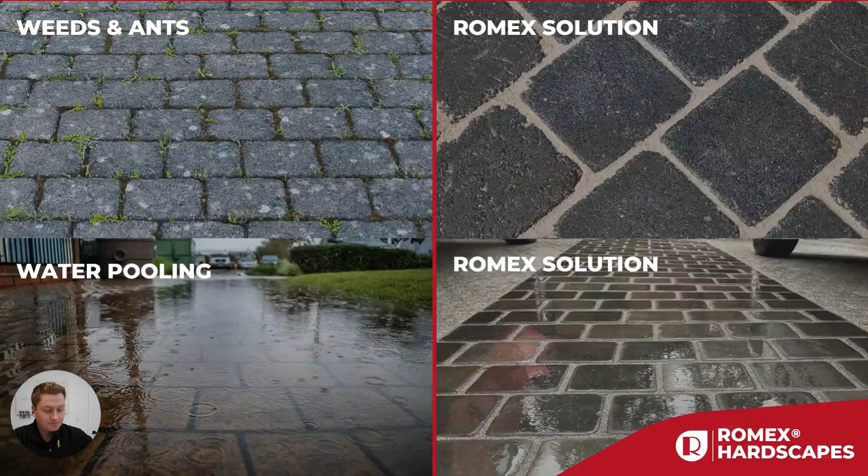So why are these products necessary? Well, in the top left of the screen, you can see lots of weeds growing out of these paver joints. So on the right, you see the equivalent ROMEX solution. So we'll provide jointing products that do not allow weeds to take hold and ants to burrow and remove jointing product.

Water pooling and water management is the next thing. Very important topic. Whether it's just you don't want to get wet feet walking into your office or classroom, or it may be a freezing issue with ice puddles and such forming in northern climates. So with ROMEX solutions, products, and consultation, we can help manage the water and ensure that those surfaces remain puddle-free.

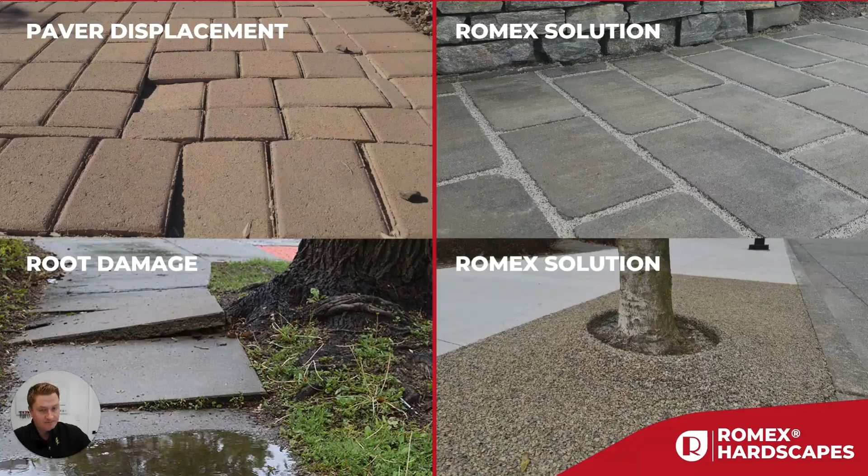The top left, another major issue is paver shift and displacement. So this might just deter people from wanting to use pavers. I always like to say that we are not a paver selling company, but we certainly help sell pavers by providing awesome setting systems, which alleviate the concerns that people may have in eventually defaulting to asphalt or concrete pour.

So we want to keep unit pavers, and setting them the right way is critical to that. So good edge restraint, good setting system, bedding, and jointing products, all preventing the movement shift, which can lead to things like ADA compliance issues, trip and slips, etc.

And then finally, root damage in the bottom left. You can see that when trees are left to their own devices or covered up, they come up looking for nutrients, air, water, etc. And if we have those covered in impervious surfaces, then unfortunately the tree will always win.

So our goal is to give pervious surfaces which are safe and good for humans to walk on, but give the trees exactly what they need so they don't come up looking to damage our hardscape surfaces. So just an array of solutions there in these first few slides as to why ROMEX solutions are necessary.

The first part we're going to look at is going to be the full system, which is the TRASS bed, adhesion elutriant, and choice of jointing product. So we could refer to this as the RSG, or ROMEX System Guarantee. It comes with three main components, which is the TRASS bed, the bedding layer that the pavers will sit on.

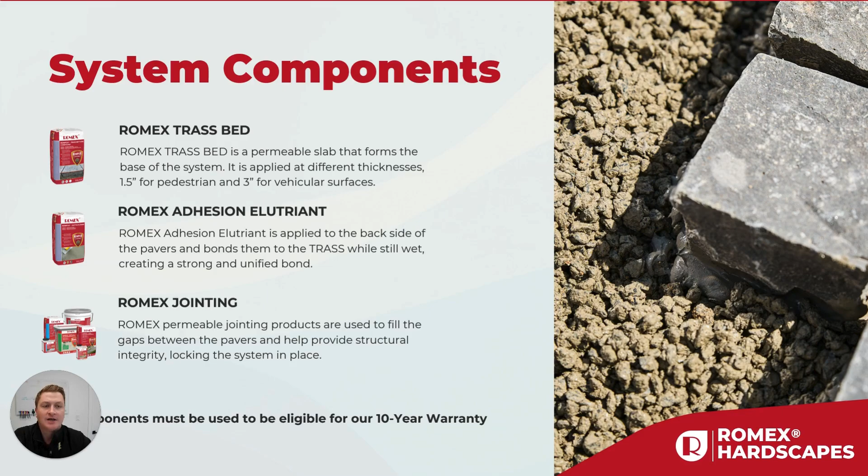The adhesion elutriant, it's like a thin set. It's what bonds the paver to the bedding layer. And then finally, ROMEX jointing product, a choice of jointing products which can fill the gaps. And we determine those based on the parameters of the project, essentially the loading, maybe the water infiltration rate required, or parameters around the unit pavers themselves, jointing width, etc.

We have a full set of detailed drawings which can accompany any project specification-wise. We have 3D images, we have these 2D images, and these really provide what I would call a basis of design.

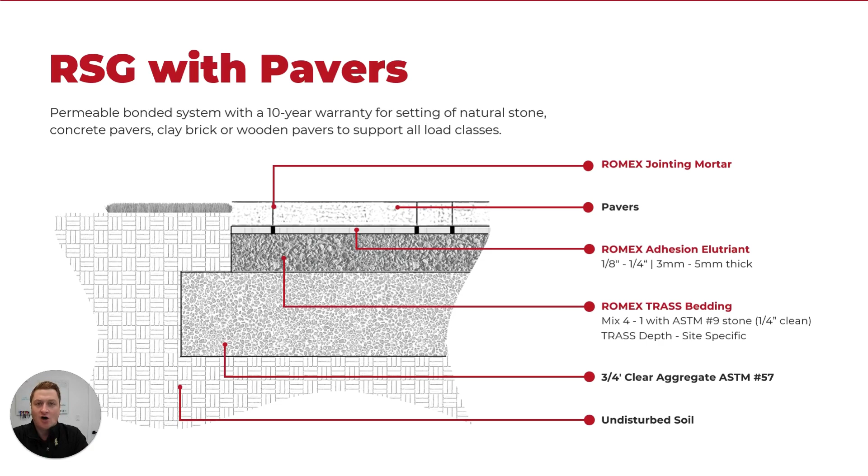Every project has its differences and quirks, but these give you a good platform, if you like, to build off of. And you can see here that our general assembly entails 3/4 inch clear crushed aggregate for on-grade applications as a base product. The ROMEX TRASS bed at a certain depth, typically 1.5 inches for pedestrian areas and up to 3 inches for vehicular. The ROMEX adhesion elutriant thin set, which is that bonding agent or glue, if you like, which goes on the bottom of the paver, bonds it to the bedding. And then, of course, the choice of paver with jointing product in between as well. So that's a classic on-grade assembly with the ROMEX system guarantee.

We also do lots and lots of square footage and installations on slab, on podium, above parking garage, amenity spaces, etc. The list goes on. So in this situation, you can see that we have the existing concrete structural slab. We then build off of that with the TRASS bedding. There may or may not be insulation required there, depending if it's a living situation or not. The adhesion elutriant, of course, bonding that paver to the bedding, and then the paver with choice of jointing going in as well. So 2 different approaches.

Of course, I just want to point out that the ROMEX system here can also be used just in overlay situations. It's not always required that you break out the concrete. As long as we have a way for the water to escape, that's the main thing that we're going to drive towards.

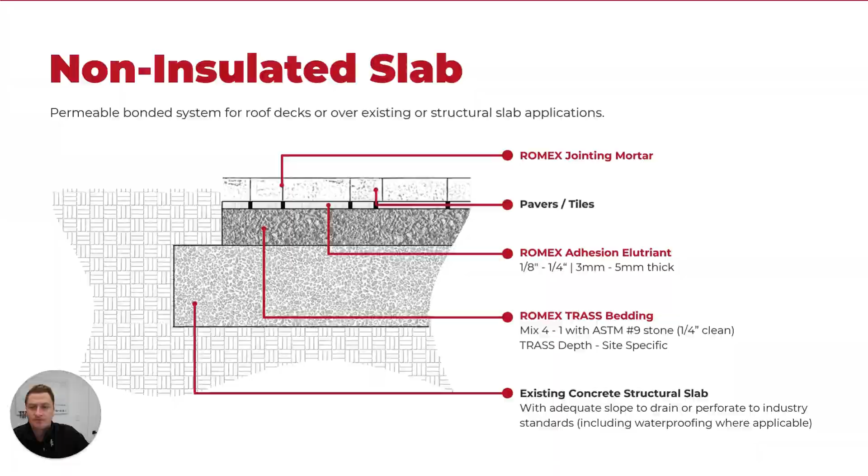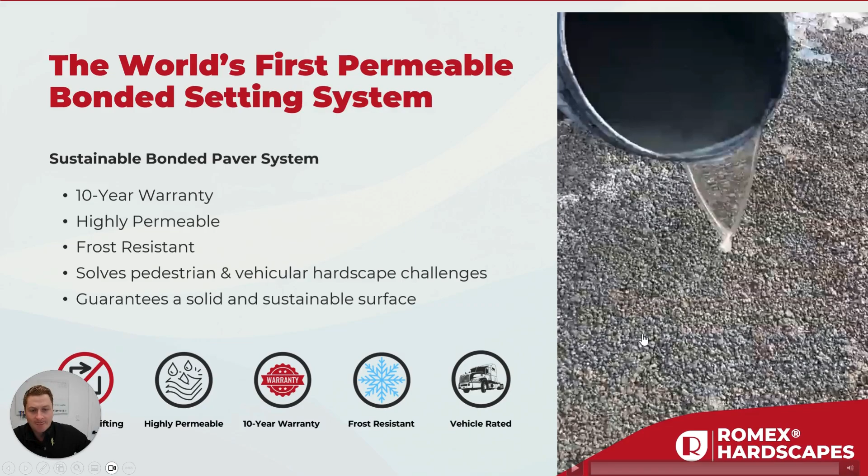So, quick look at the TRASS bed. This is the world's first permeable bonded setting system. ROMEX was the first to create an entirely permeable bonded setting system using TRASS bed, adhesion elutriant thin set, and a choice of jointing product in between. You can see here when I play the video, the bucket of water getting poured onto the TRASS bed. It's extremely porous. It basically just disappears the moment it touches. We have the ability to provide this system with a 10-year warranty, which can be applied for through our website.

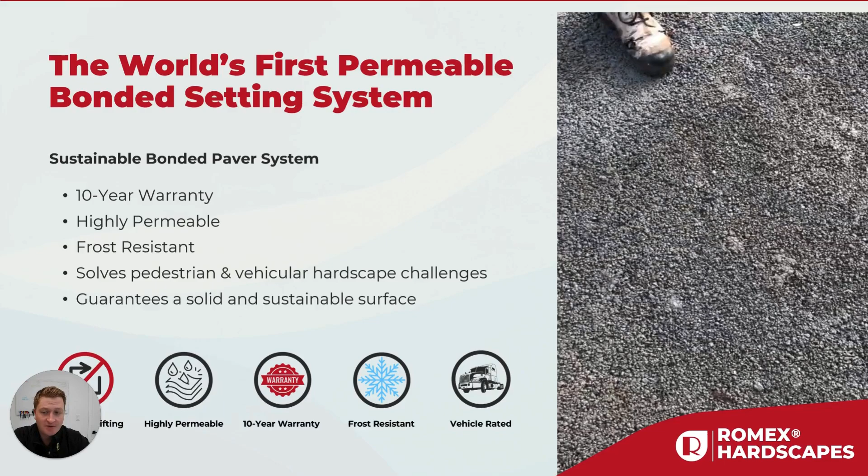It is, of course, highly permeable. By eliminating trapped water, it becomes frost resistant. So if there's no water trapped in the system, there will be no frost heave present. It solves the pedestrian and vehicular hardscape challenges. So whether that is, again, water management, the ability to power wash and easily maintain, use de-icing chemicals, or just paver shift, which causes trip and slip and possible lawsuits, these systems will resolve all of those issues, and it guarantees a solid and sustainable surface overall. And you can see some of the main icons at the bottom of the screen here, just as reminders of the key bullet points.

So TRASS bed is a direct replacement for the need to pour concrete or into the mud setting or wet setting type applications. It's an upgrade to sand setting pavers, of course, but it actually is a time and money saver when it comes to the traditional methods of pouring concrete and bonding. So the reasons why is there's no forming, rebar, and slab prep. And also critically, these products won't allow any efflorescence to leach out. We have suppressants in there through the polymer technology, which latch on and prevent those chemicals coming out, which provide efflorescence. And of course, the jointing on the surface is a resin product rather than a cementitious product as well.

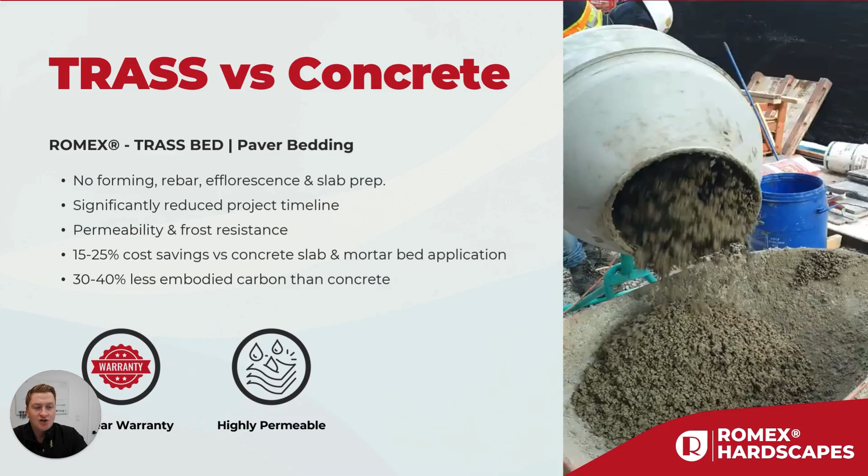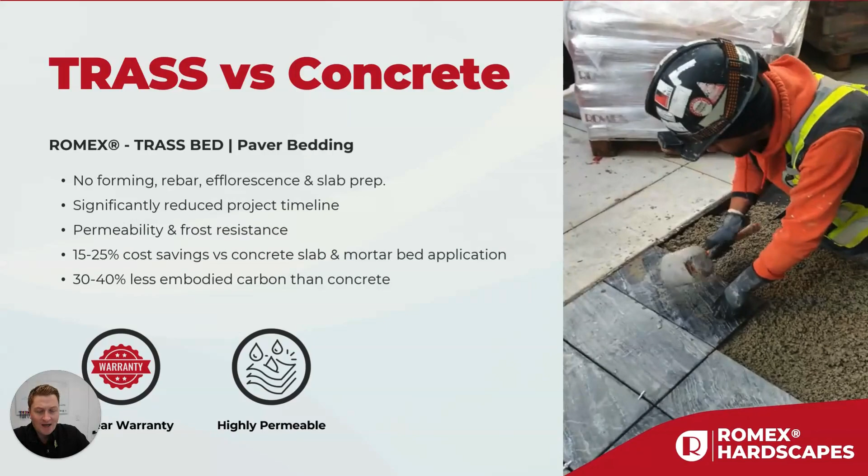There's significantly reduced project timeline. That is because you are not going through the rigmarole and process of pouring, doing rebar, prepping a concrete slab, waiting for it to cure. You're actually installing and mixing the trass on day one. You can see here the freshly mixed trass bedding coming out of a cement mixer, simply getting wheeled over to the area of site. This is an on-slab application here. The material is loosely screeded into place, thin set applied, and we're setting the pavers wet to wet. So that slab is doing a 2-in-1 job. It is the support structure and also the bedding application as well. So you're cutting out an entire step there. Much faster application, time is money.

It's got permeability and frost resistance. We just touched on that a short minute ago, but because it will not hold water, it is therefore highly, highly frost resistant. There's approximately 15 to 25% savings on the ROMEX system here versus pouring a slab and mortar setting down. A lot of that comes from the time, money, and effort spent on pouring concrete. And the reason for the range is that obviously costs vary depending on which part of the continent you may be in.

And finally, there's 30 to 40% less embodied carbon in the trass product than there is in typical sand and cement. So if that's a key driver for your project, please feel free to come and talk to us about that. But essentially, the trass contains minerals, rather than being entirely fired by energy, such as Portland cement is.

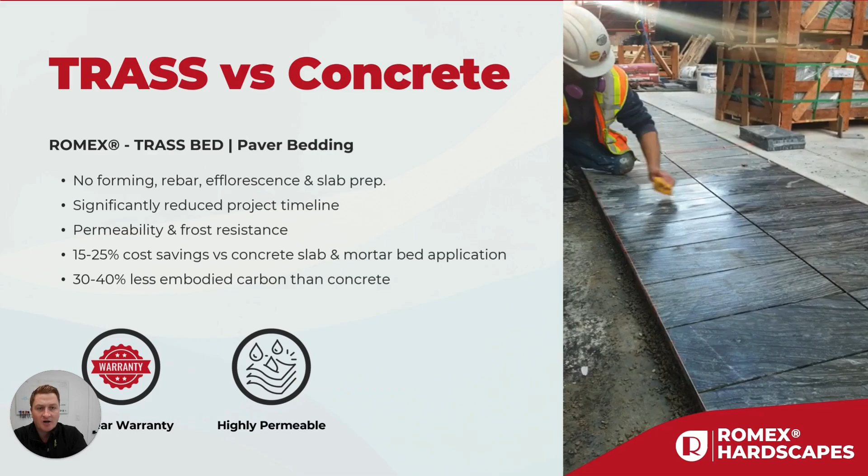Like I said, this system, 3 parts, the trass bed, the adhesion elutriant thin set, and the paver jointing, is available with our market-leading 10-year system warranty. So to touch on the adhesion elutriant just for a moment, I like to refer to it as an unsung hero. Doesn't get a lot of limelight, but it does an amazing job basically making the paver unit and the bedding become one. So I like to say if we have 3 inches of trass bed with a 3-inch paver, essentially you have a 6-inch slab altogether in that mix, providing great strength and durability, of course.

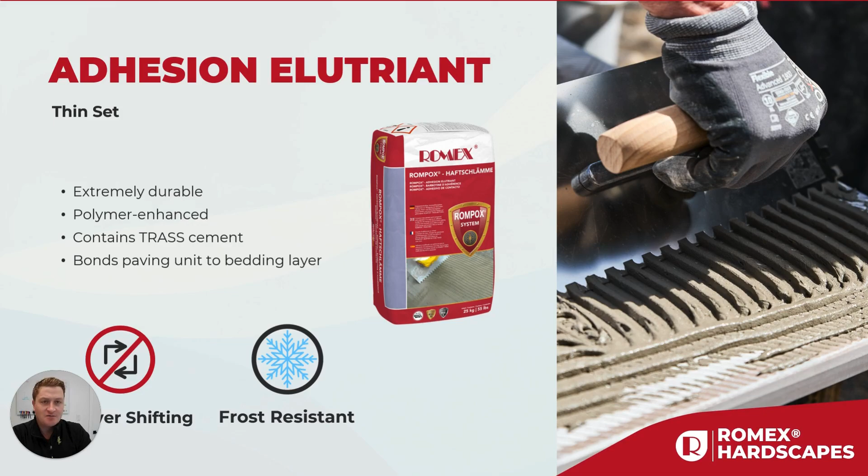So the thin set is a sister product of the trass, so the two of them want to join together. We get exceptionally strong paver pull tests on site, usually in and around 2.4 MPa, of course, general industry standard being 0.5. It contains the polymer enhancements that the trass does as well, even contains some trass cement, and like I said, does the great work of bonding that unit paver to the bedding system. Typically, it's applied to larger units via notch trowel per North American tile setting standards. Smaller units, it is possible to just smear on the thin set with a margin trowel or even dip it into a bucket.

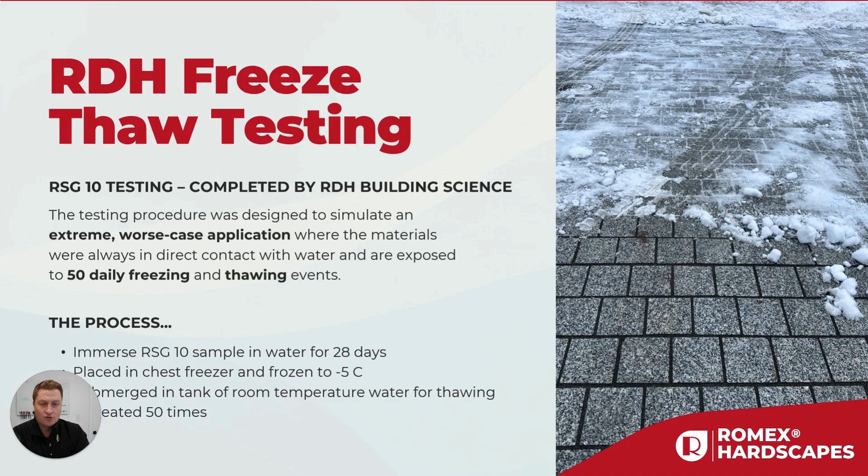Now, to back up what we've been saying, we engaged with RDH Building Science, who created an independent third-party frost test for the system. So what we did there was we created cookies of trass bed, granite pavers with the whole system, and they were sent off for testing. So this was to simulate a worst case scenario application where the materials were in direct contact with water and exposed to 50 freeze thawing events. So the cookies were placed in water for 28 days to fully saturate them, and then basically on a daily basis they were frozen and thawed out 50 times. Just to put it into context, typically clay brick will blow apart at about the 25 to 30 cycles. And of course, we have the report to show that our system went through the full 50.

The great news is that there's a whole variety of uses for this trass system as a drainage slab essentially. But one of the many great uses and something that's really taken on is with radiant heat systems. So lots of projects being done over in the west coast of Canada with Whistler Blackcomb Ski Resort, and now more into the US, Rocky region, Park City, etc. as well. So it's well worth considering. Like I said, great benefit to eliminate the concrete slab.

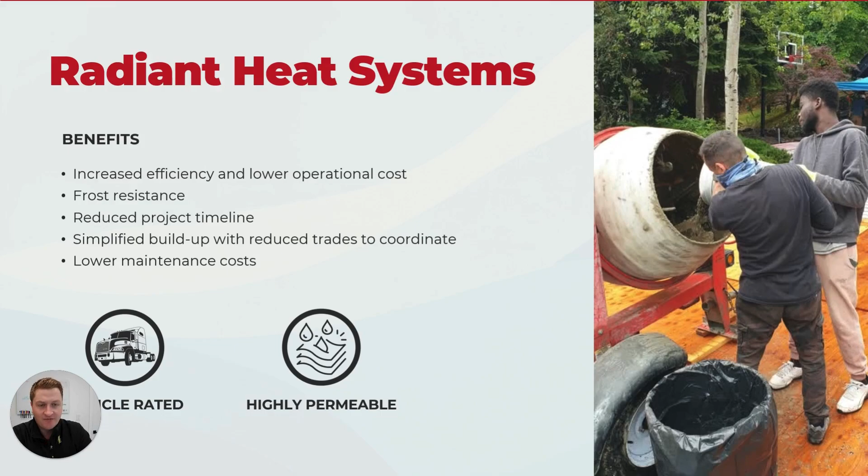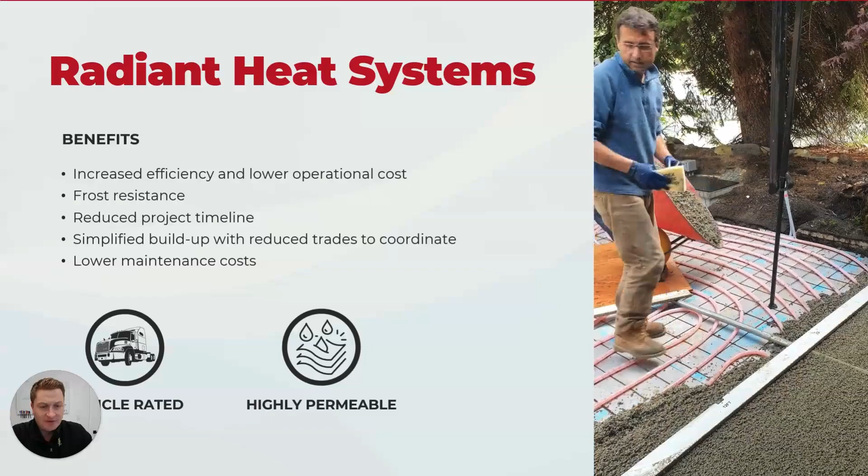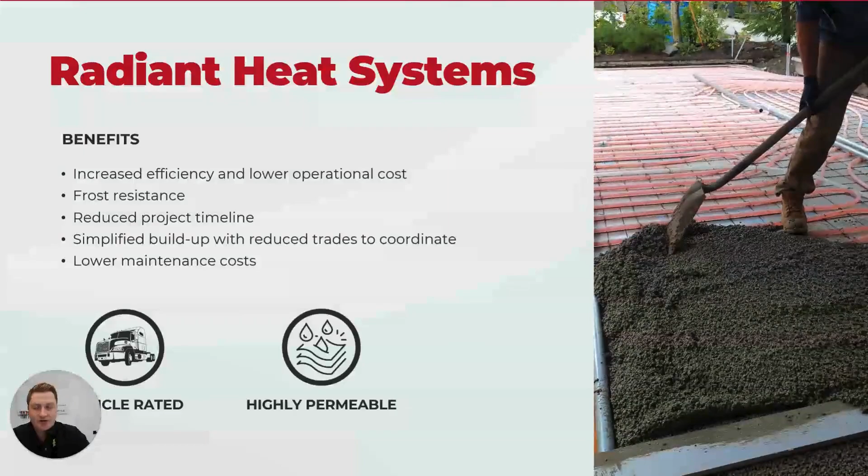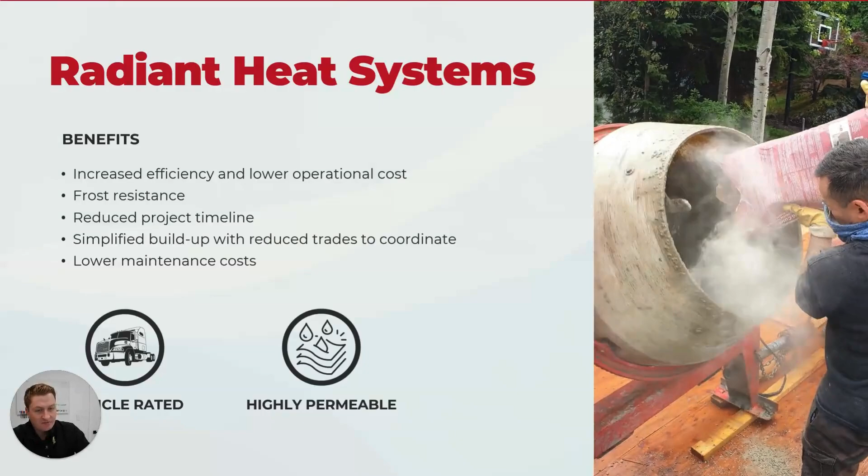You can see in the video here the trass being mixed. So that's the stone, aggregate, powder, water going in. Mixes for a few minutes, and then it's simply brought over to the area of the site and is placed over the heating tubes. From there, the pavers are then thin set with the adhesion elutriant and of course finally jointed in, and you can see another example of the water permeability on the video. So what this brings is increased efficiency and lower overall costs, frost resistance, reduced project timelines, again, not waiting for that slab pour to go down, simplified build-up, reduces the amount of trades, etc. to coordinate, and overall lower maintenance costs. This system has proven extremely successful where we have installed it.

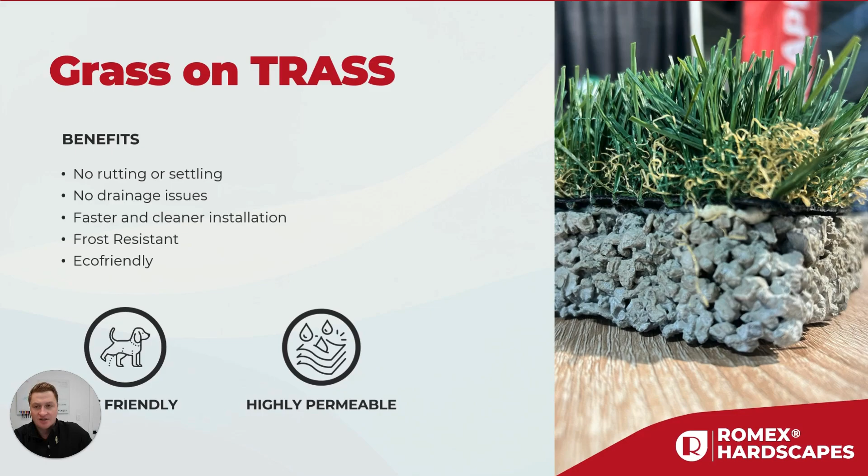One other great use for trass bed is grass on trass. So in areas where you might have drainage issues, where turf can be the victim of rutting or settling, you may need a faster, cleaner installation, frost resistance, but mostly it'll be for a drainage benefit and of course rutting, settling, as I say. So think about sports fields that can get super soggy. For the most part, turf is set over non-porous materials because they have to be spiked in, they have to grab hold. So this is a fantastic way to create a fully permeable, stable surface. And whether that's for dog pee areas, dog runs, etc., sports fields, golf tee boxes, temporary parking spots, the trass is a great way to elevate the game when it comes to installing artificial turf. The turf can be spread out and then simply glued down in place to the trass bed.

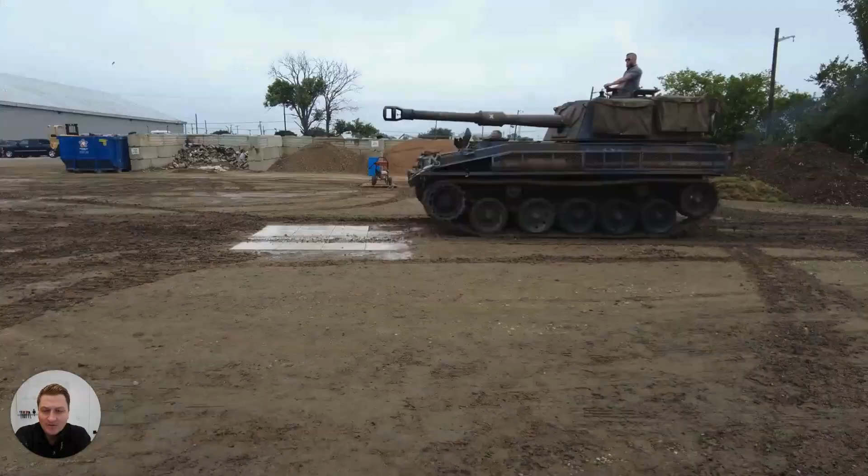Now, in terms of the durability, it's really not in question, but in case anybody had any doubts, we ran a test in the lot of the largest paving installer in Texas several years ago. Here we ended up utilizing a military vehicle, a 90,000-pound semi fully loaded, as well as flatbed truck and other vehicles. And we spent the day driving over this 2 cm porcelain over 3 inches of our trass bed with, of course, the open graded base stone below that.

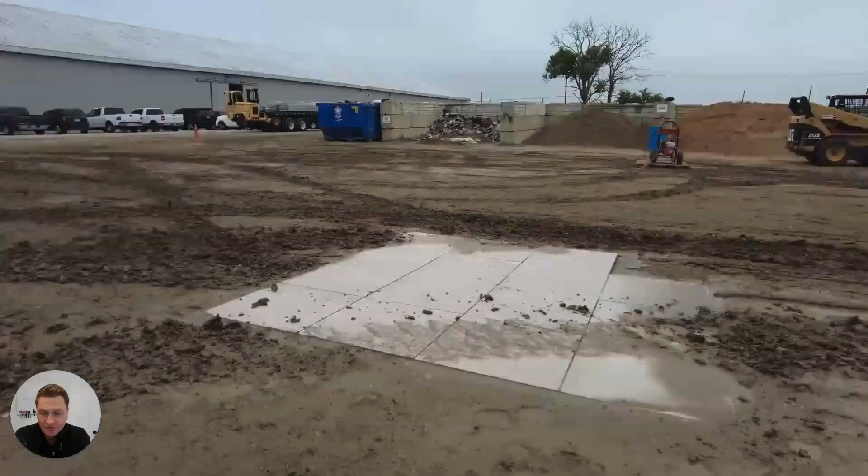And of course, it went through all of these tests with flying colors. We were able to power wash and restore permeability despite all the mud, etc. And really just showed the strength and durability of the setting system.

Now, we're going to talk briefly about open graded base materials. So we've done a lot of mention of permeability so far in the presentation, and that of course is absolutely critical, managing water. It also plays into just general stability, good practice, things like that. So how we would like to see the build-up going is basically to use ASTM number 57 stone as the subgrade, so 3/4 inch clear.

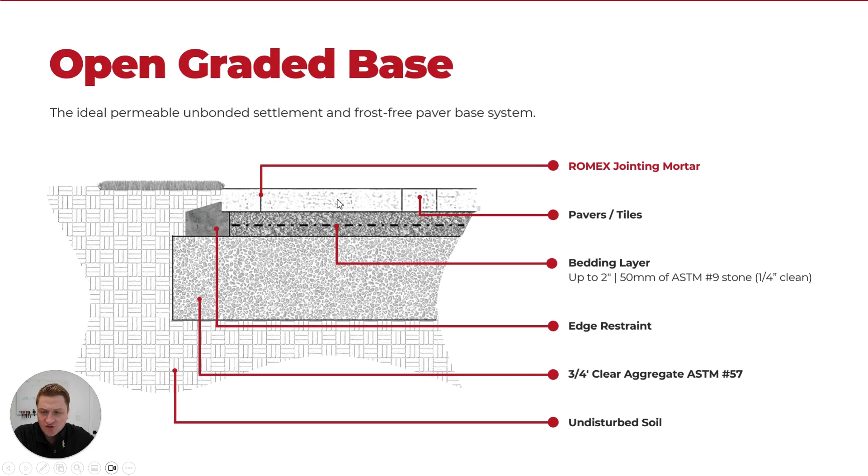The bedding layer, whether mixed with a trass or just a loose stone, is typically a number 8 or 9 type stone, up to 2 inches thick. And then, of course, the pavers sitting on top of that. And that just really prevents any resistance to migration of water. You'll find that the site is much cleaner to work on, and lots of great benefits to that.

But very easy to do. It's actually less reliant on compaction and lifts like dense graded bases. There will be no base sinking and washout. Where it is, is where it will stay. It's workable in any weather condition. So I'm sure everybody's been onto job sites where the bobcat or machines have been driving around and it's a real mud pit. Well, if the preparation is done with 3/4 clear, that will not be a thing.

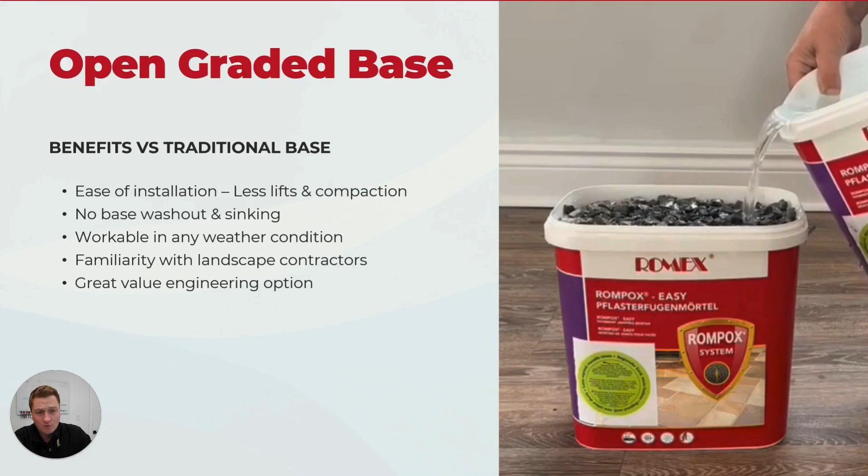And there's just a general familiarity. Most cases, the aggregates really match up to the sort of the road base or dense graded type materials. The sand is very equivalent to the ASTM 8 or 9 stone. And so there's not really a cost change here, but the output will be greatly different and provide a much better project overall. Here's just some examples of some beautiful projects that we've been involved working with.

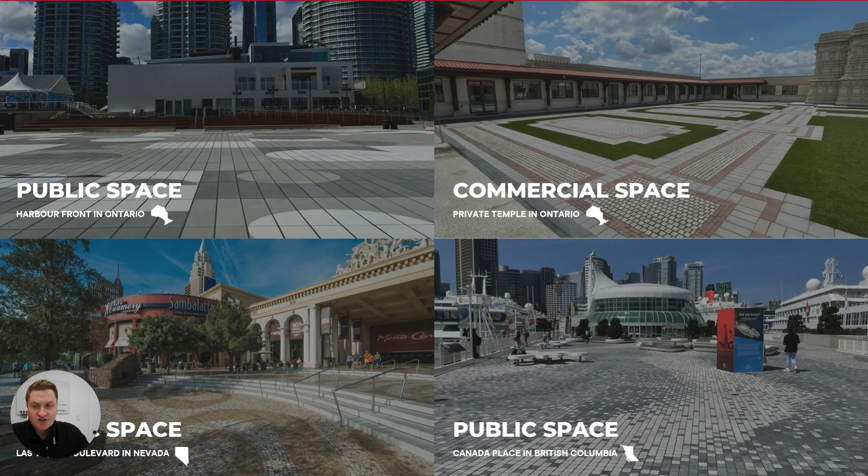And of course, bottom right is Canada Place. That was our original commercial project, now coming up to about 9 years old in British Columbia, Canada. And I'm pleased to say that those guys are actually embarking on a whole bunch more projects because, to quote them, these products are lasting better than anything else around the building. And finally, top left, a large public space over in Toronto in Ontario, Canada. Again, frost, salty, high traffic, tough weather spot, and of course these products surviving nonetheless.

So we're going to touch just briefly now on the paver jointing. I often think this is a part of landscape or hardscape construction which is undervalued, and that's really to the detriment of the project. It'll be the first thing that you notice if weeds start growing out, if the jointing disappears, if you can't power wash because the jointing's been removed, whole bunch of problems like that. Actually, the interlock of concrete pavers can be compromised once the jointing sand is gone.

So having it stay in there is not holding it together, but it's part of the integrity of the surface. So we have jointing options for all kinds of pavers.

They're highly water permeable. We believe that not resisting water is the key to success long term, and that's been proven over many decades. They're easy to use. They're power washer safe, which again, how do you clean your patio if you can't really power wash or rinse it off?

And it does not require replacement. So there may be cheaper options on the market, but the first time you replace those products, you're going to exceed the cost of what it was to have these great ROMEX solutions. And who wants to be dealing with these issues in June, July, and August when it's beautiful weather out and you'd rather be doing something better?

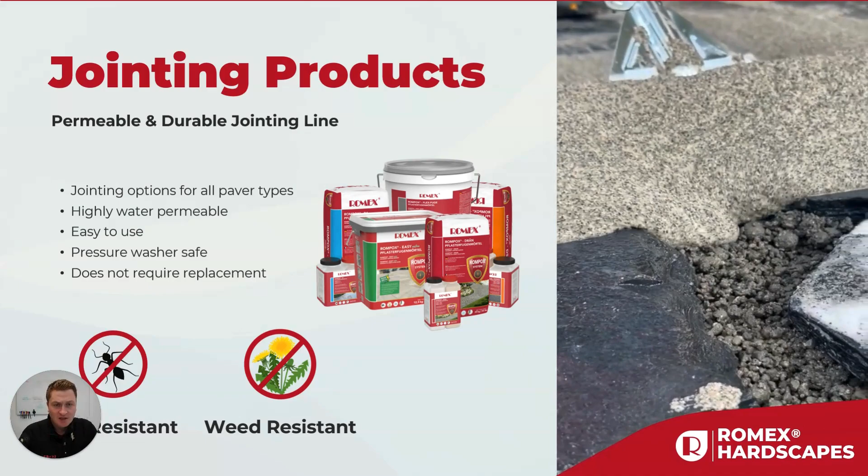So you can see here an example of one of our slurry grout products. That's a huge benefit. It'll fall into the joints, surround the pavers, and you have the same strength of jointing all the way from the bottom to the top.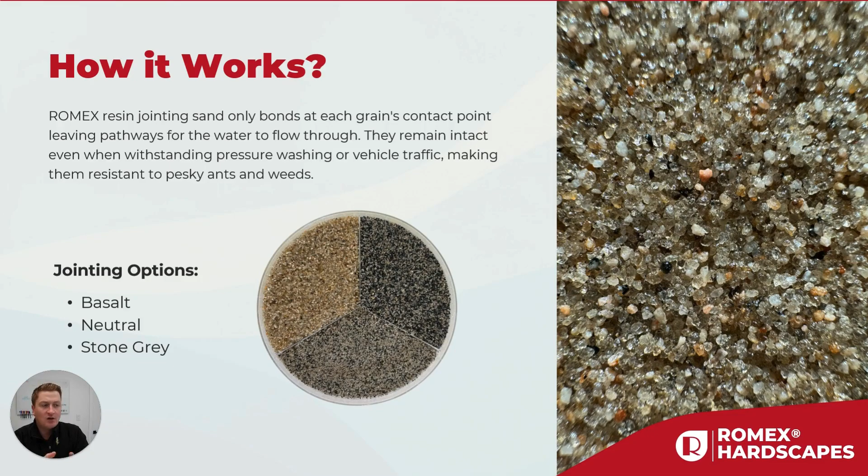So the particles bond at the contact points, creating a very strong structure, but still allowing the water to run through. And that's how we have that sort of magic trick of a solid surface that also allows the water to run through it.

Here's an example on a job site. This is a newly completed concrete paver driveway utilizing our flex joint. And you can see there that 5 gallon bucket of water instantly disappears once it hits the surface.

So the ROMEX surfaces allow water to pass through without pooling. They allow for greater control and management of water whilst reducing pollutants and contaminants from entering the waterways.

So the top will act like a bit of a filter, and that's why we recommend biannual power washing, just to blow that sediment, dirt, and debris out of the top. It keeps it functioning, keeps it looking great, no need to replace it. So these products are fantastic tools when it comes to green infrastructure projects, city and municipal permitting.

Wouldn't be the first time that we've heard about the infiltration requirements on job sites. So how big's your house versus your driveway, your pool deck? And all kinds of different regions now are going to be coming up with regulations and permitting controls against how much of your hardscape can be impervious.

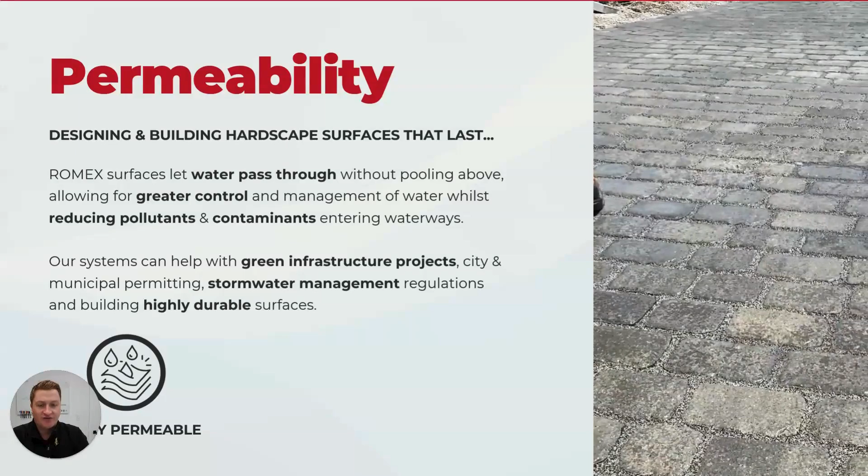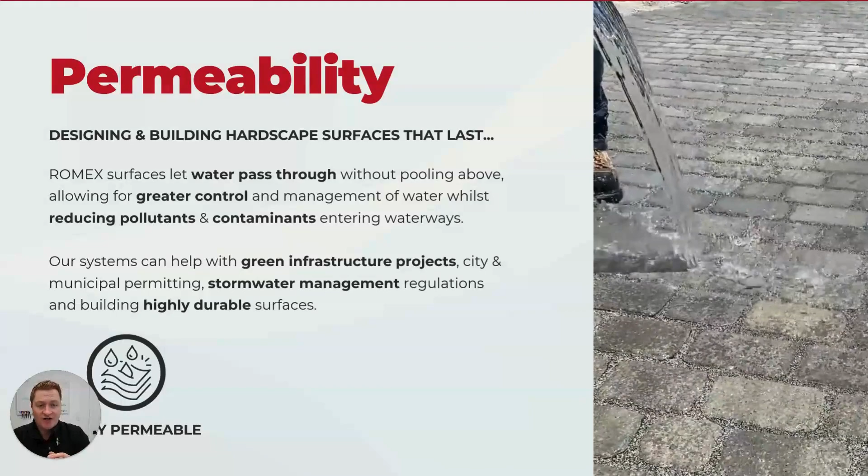Stormwater management and just building highly durable surfaces. So really whatever the driving factor is here, we have something for you. Whether you're trying to hit municipal permitting, green infrastructure planning, or you just want really durable stuff because you need to power wash regularly because you're Disneyland or the Las Vegas Strip, these products will resonate for you. And ease and speed of install, of course, not forgetting the contractors who do the great work.

In terms of the power washing, I've mentioned that a few times. I'm just going to show a quick example here of a driveway that's about 4 years old now. There was some subsequent landscape work done after a period of time, dirt bins, excavator and such, and you can see that it made a right mess.

So we thought this would be a great opportunity to show some pretty intensive power washing, as well as restoration of the permeability, because that's a common question we get. This is all great on day one, but what happens if it gets clogged up?

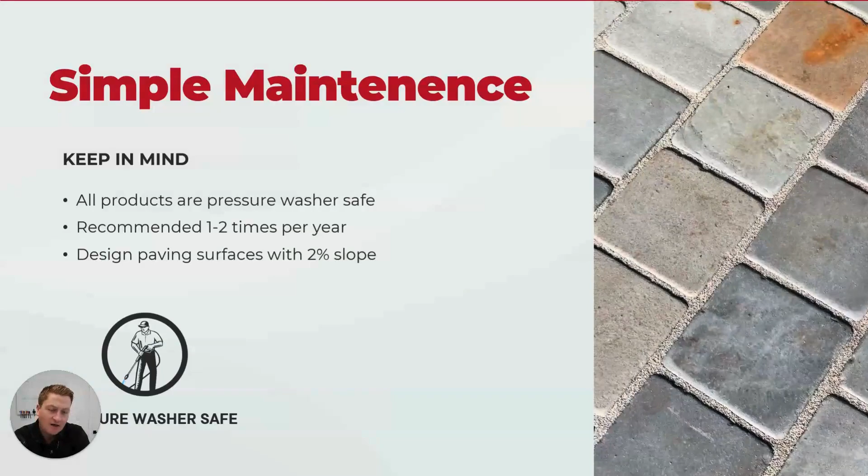So here we are blasting away all the thick dirt and then doing a little bit of detailing. And of course, right at the end, we'll see the final result here once it's all cleaned up, and the water getting poured on the joint and disappearing back through. So there's a great example of being able to do that without damaging the hardscape at all.

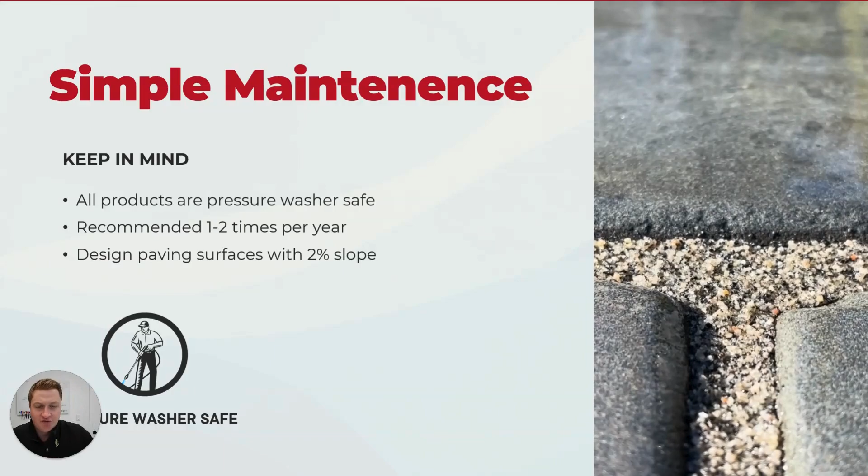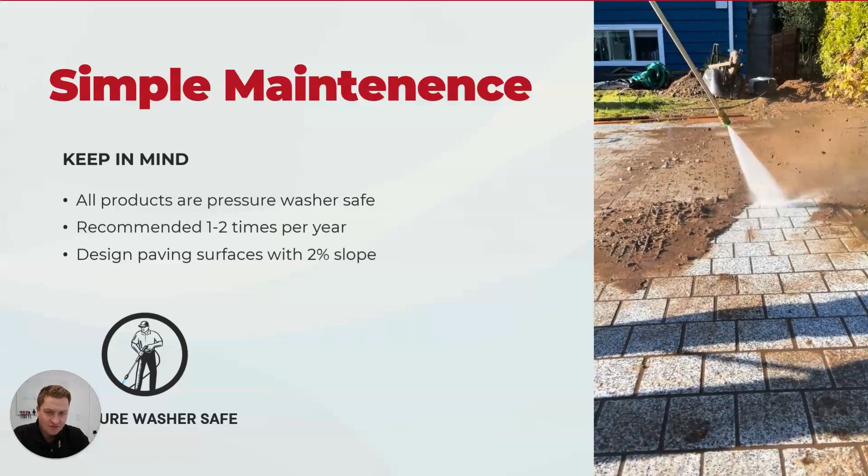We still, despite the permeability though, recommend about a 2% slope where possible or greater. That just helps to keep things flowing off the surface. It prevents the pavers themselves from holding water, and of course it actually just keeps the surface generally cleaner for a longer period of time as particles and things are able to wipe off the surface.

The joining products can be used with really any type of paver product that you can think of.

We have done installations with all of the above, including concrete pavers, natural stone, porcelain tile, and wood block, such as the old streets of Chicago and Philadelphia, with our flex joint. Flagstone is very common, and of course clay brick as well. If there are others we haven't mentioned, feel free to ask, but I see no reason why not.

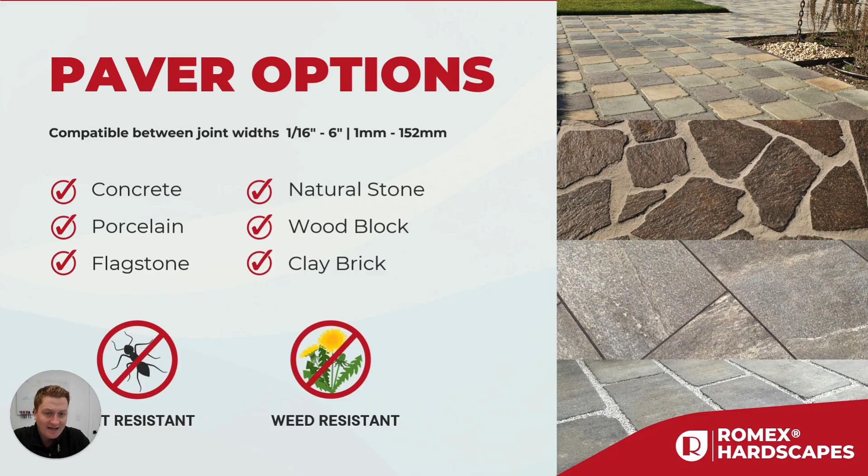As you can see, there's a variety of joint sizes, from very small down at around 1/8 or even 1/16 inch, up to even 4 or 5 inch gaps sometimes in flagstone. So there's no upper limit on those.

We have a special combination product for interlocking concrete pavers, which make up about 80% of the paving market. Polymeric sand is a commonly used joint product for that, so it's kind of a good idea. You get a bit of binder in there, you wet it down, and it takes hold. However, unfortunately, in a lot of northern climates, and through power washing and other maintenance, this product becomes soft. It doesn't stay there anymore and requires replacing.

So we've come up with a water permeable polymer sand product, which is then activated with our D7000 stabilizer. It provides a little bit of sealing benefit to the surface.

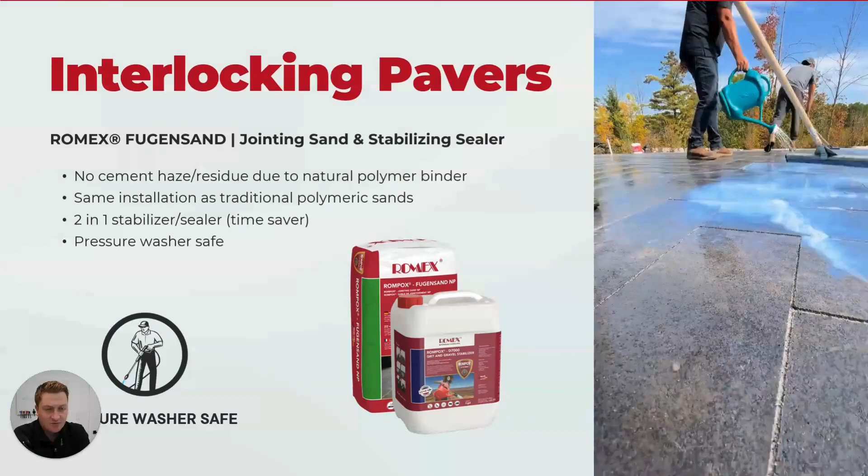And this is kind of how it goes: the sand is swept in and wetted, just like regular polymeric sand, to set it. Then this liquid is sprayed across the surface and squeegeed around. You remove any puddles or excess with the squeegee. It percolates through the joints and provides an extra layer of gluing, if you like, as well as a light seal of the paver surface.

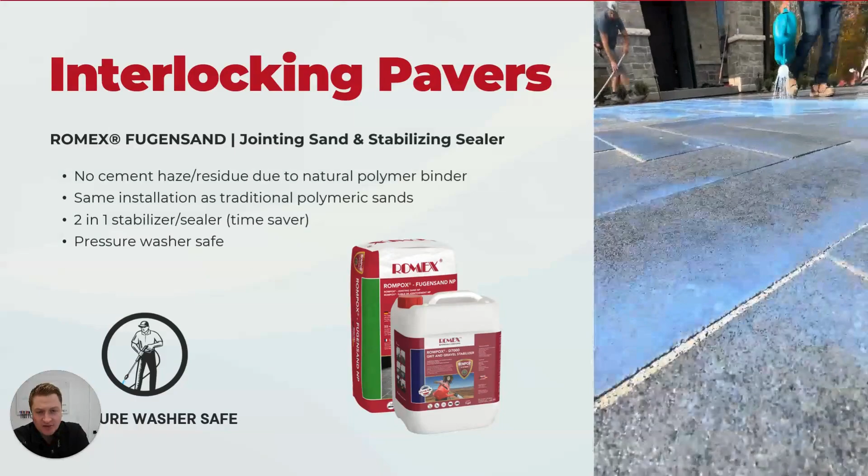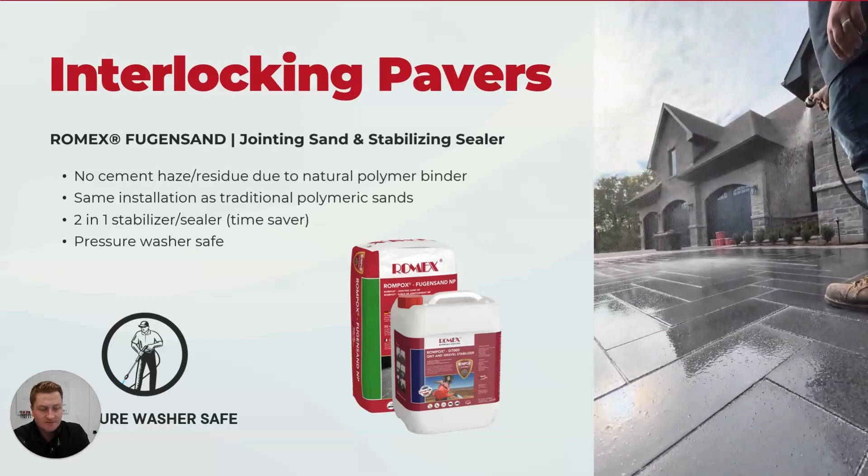With that combination, you now have a permeable joint product that's de-icing and pool chemical safe, and of course can be power washed anytime. So the magic here is there's no cements or gels or anything to activate it. It's a choice of 5 natural polymers that allows them to be permeable, allowing water to penetrate through, with the stabilizer giving you that solid surface. It doesn't just seal at the top like a 1/4 inch, as can happen sometimes with those types of products.

The other key product I would draw your attention to is EcoFine. It is by far the leader in terms of prepackaged resin sands on the market—pool chemical safe, super strong, basically a DIY type application with commercial results. It also will not stain or mark any kind of paver. We've tested this even on sensitive stones such as Indiana limestone, for example.

It comes in a bucket, made in the USA. You pull it out of the bucket, cut the bag, wet the surface, and pour the contents of the bag onto the surface. Then, along with a jet of water and a squeegee, you wet slurry the product into the joints. Once the joints are all filled up, you simply sweep the excess off the surface and let it cure through air. An exceptional product, and well worth having as part of your landscape.

We have one very unique product at ROMEX. We're the only company in the world to have a flexible permeable joint product. This flex joint is a combination of flexible resin, sand, and rubber particles. It moves up to about 10%, making it fantastic as a replacement for loose ASTM 8 material in permeable pavers.

Why? Because that material needs replacing every 1 to 3 years via vacuuming. It creates a mess, it's liable to come out—whether through power washing or just use and wear and tear—and then you can have the pavers moving all over the place. We've done several projects replacing that product, but I'd suggest getting the flex joint in from the start. You'll essentially have what looks and feels like a masonry installed project, but with a flexible base product that's much faster and quicker to install. The magic is the flex joint itself.

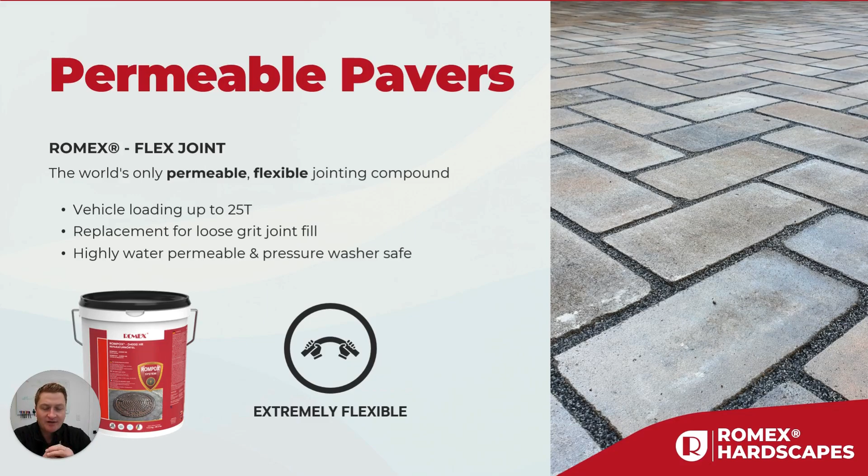It can be power washed, is de-icing and salt resistant, and is good for even up to fire truck rating. It's really an amazing product. So what we try to do is keep to the mentality that when we have a flexible base, we use a flexible joint product. And if we have a rigid base, such as the trass setting system, then we can use one of our rigid jointing products in that scenario.

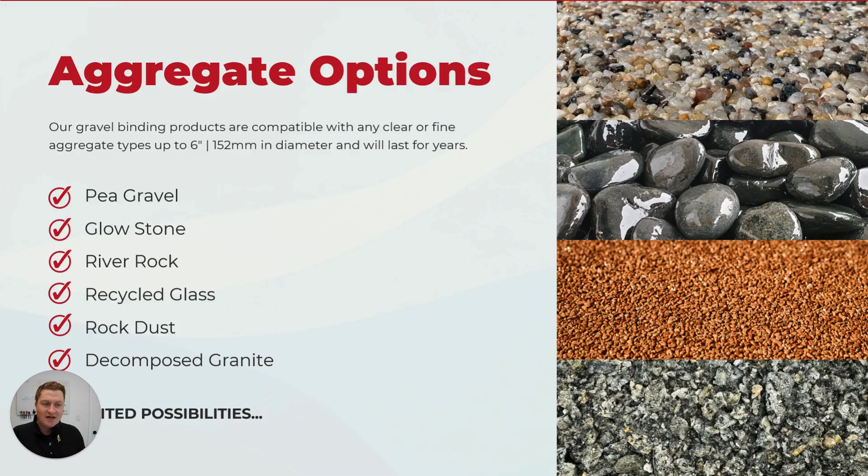Now the final topic that we're going to talk about, very popular, is actually gravel binding. We have a couple different methods of doing so. The photos on the right side of the screen here show you all kinds of options that we can do, from beautiful small stones, different colors, to larger round pebbles. And you can see the list on the screen here with pea gravel. We even have some glowstone applications, river rocks, recycled glass, and then rock dust and decomposed granite, using a slightly different binder for that. So really, ROMEX is a series of aggregate binders, and we can lock that stuff in place, making sure it remains low maintenance and an enjoyable, safe space for many years to come.

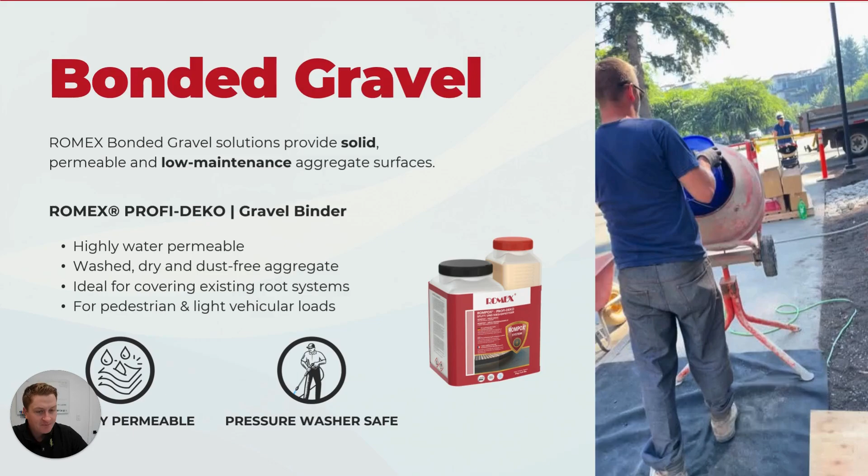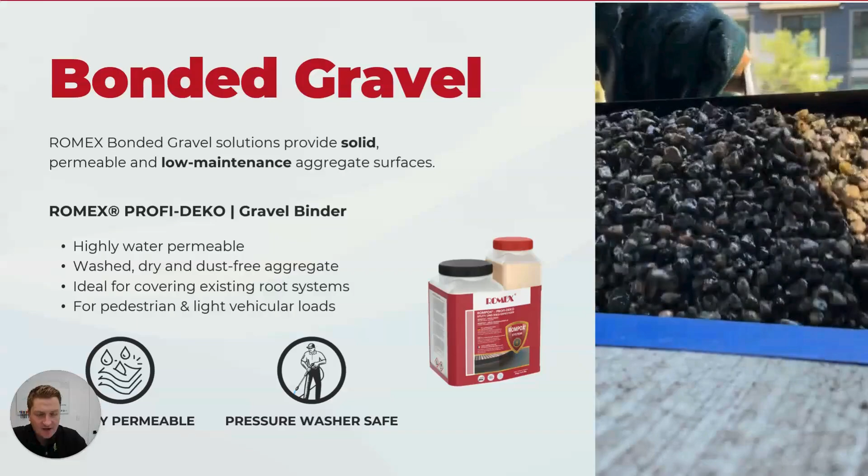So the first product we're going to talk about of the two is the Profi-Deko. So this is for any of your clean aggregates. No dust, no fines. We want the clean, dry, pea gravel type aggregate. So how it works is two 5-gallon buckets of stone, or approximately 150 pounds, into the mixer with the resin. That mixes for about 5 minutes. It's then taken over to the area of the site and screeded out, usually at 1.5 to 2 inches thick, over the base aggregate.

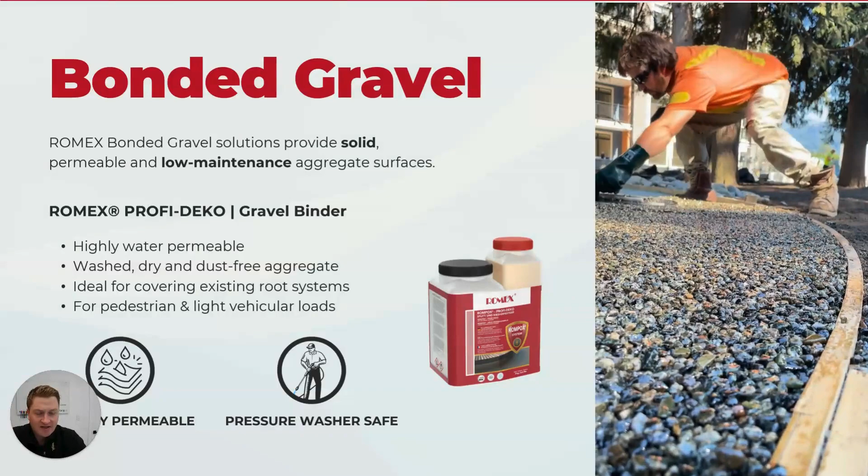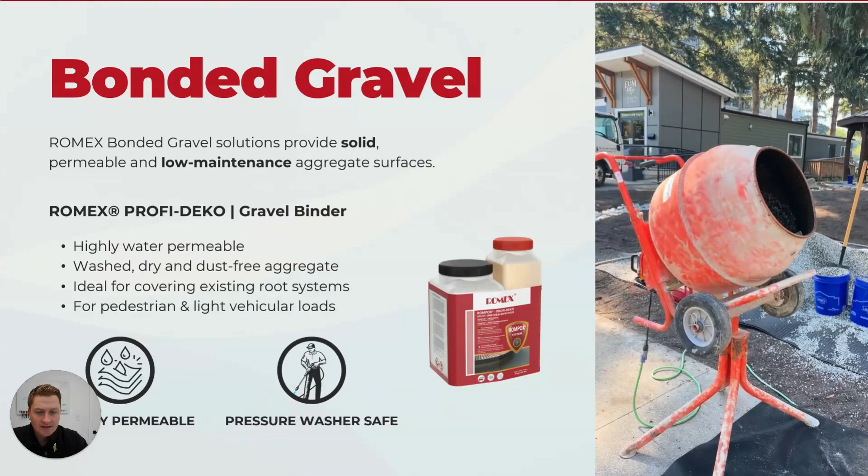So often folks who do concrete pouring are very good at this. Nonetheless, I find it quite a fun product to install. Like I said, lots of colors, design. The tagline, durable solutions, endless possibilities, really resonates with this one. Fantastic stormwater management tool, the water just runs through it. It can be done as a border for pavers, and of course, tree surrounds being a big one here.

So if you look at this video, this was an existing tree where we came in and applied the Profi-Deko solution with a local granite aggregate, about 2 inches thick. You can see we've left a bit of a collar for the tree there. And of course, when you go in and pour the water on, it just runs right through, so the tree's getting what it needs.

Beautiful ADA compliant pathway. I should mention the ADA compliance is related to the choice of stone, not just whether the resin is applicable or not. That's not the case. So you can imagine that the stone should really be up to about 3/8 inch in size. If you start going bigger than that, it gets uncomfortable to walk on and uncomfortable to roll a wheelchair on. That's where your ADA compliance issues will come in.

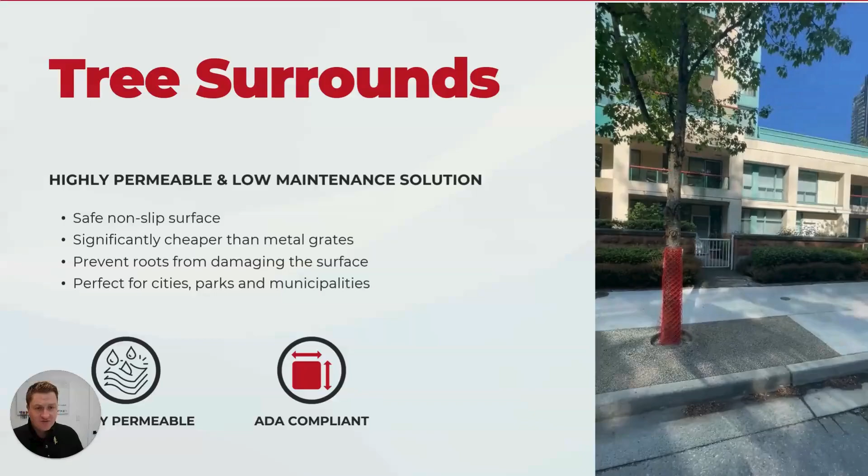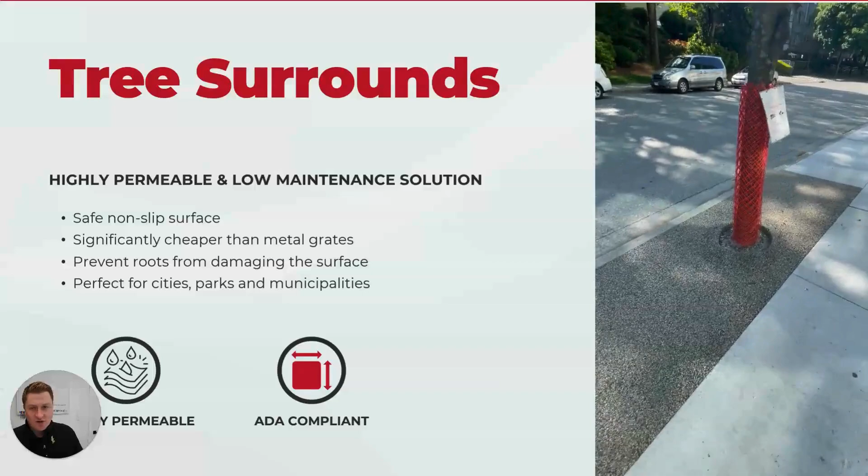So we can provide safe non-slip surfaces. It's significantly more cost effective for city trees than metal grates and other types of solutions, by a huge factor actually. Prevents roots from damaging the surfaces, and it's perfect for cities, parks, municipalities, all kinds of areas where an aggregate pathway and tree surround would be desired, but a maintenance headache at the end of the day.

Now, switching gears, the other type of aggregate binder that we have on the roster is the D7000. So this is actually the same product that we talked about earlier, which pairs with the D7 Fugensand for concrete paver joint stabilization. Well, we also use it in this aspect for your sandier aggregates, so decomposed granite, crusher fines, different terminologies in different areas, but you can see the difference there.

So it's great for garden pathways, parking areas, public spaces, easy topical application, and it basically reduces and alleviates erosion, dust, weed growth, etc. So the aggregate is spread out at a good couple, 2.5 inches thick. The first coat is applied. We then apply the plate compaction equipment over top, and then a second coat is applied soon after that.

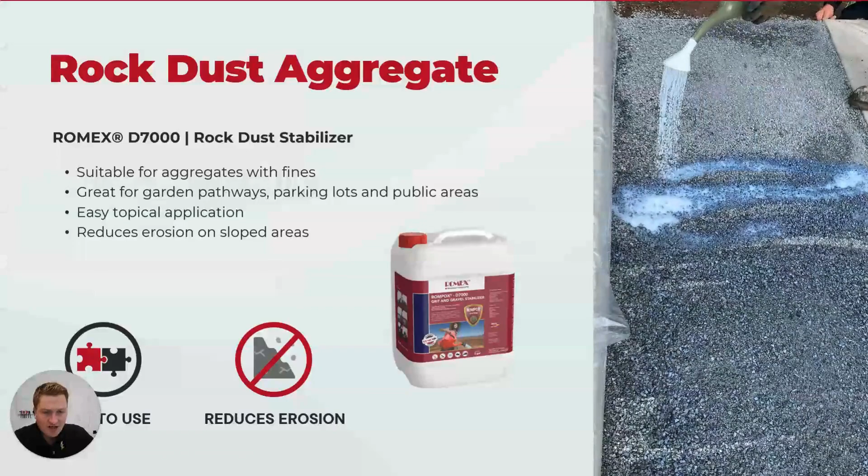Once left to cure, it provides a really solid, stable surface, prevents washout and rutting, and dust in the summertime, plus typical issues with weeds growing in. It's quite common that park pathways and similar areas are used by parents with strollers or anyone needing wheelchair accessibility, and that can be a real pain without stabilization.

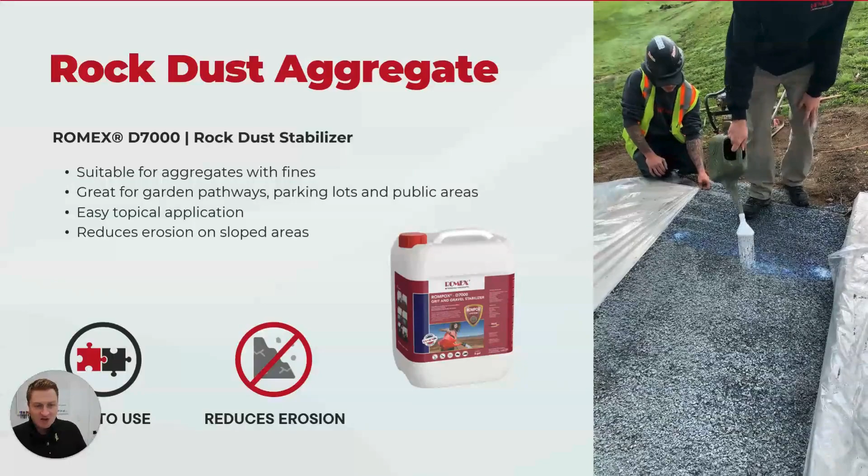So this is a way to very economically stabilize those pathways, keeping the natural look of the aggregates without the need to pour concrete, asphalt, or other materials. Lots of good examples here.

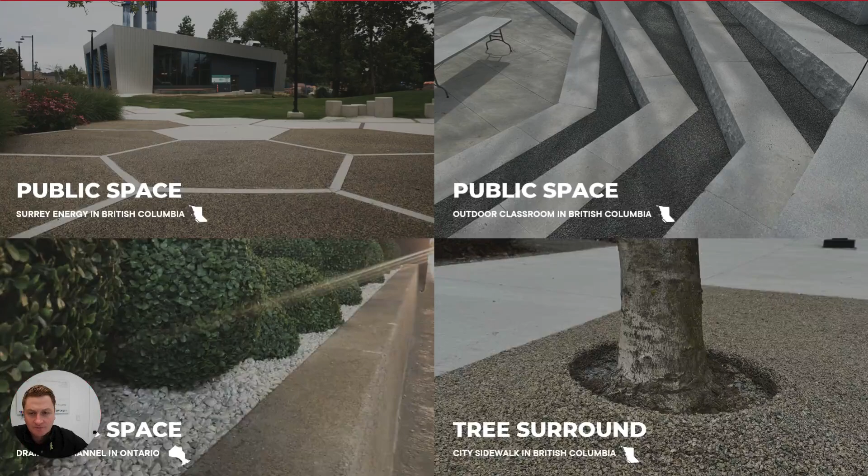Over in the public realm, top left we have this beautiful flip-flop design with concrete and the bonded aggregate. Bottom left is some white aggregates outside of a hospital, which is a public space, so it's good to have those bonded down.

Tree surround, and top right, this is actually an outdoor classroom where the kids were picking up rocks and throwing them at each other during class. So we came in and bonded those aggregates down, spoiled their fun a bit, but created a nice, safe, durable space nonetheless. The final part of this presentation is, of course, the ROMEX Isotech Earth Anchors.

These are proprietary products for ROMEX. They work in conjunction with our jointing product, typically the Fugensand D7000 or Flex Joint. Why? Because we're going on a flexible base, so we want a flexible jointing product to prevent cracking, breaking, and other damage.

So the anchors get placed into the bedding layer, and you can see in the image that the flange pokes up and supports the paver. These actually provide about 70% extra displacement protection under vehicle load compared to not having them.

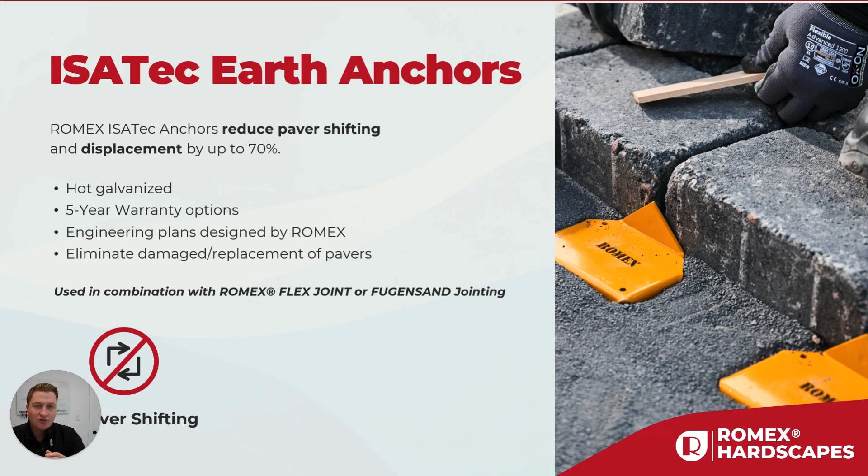So the first thing is to make sure that the jointing stays in place. The second thing is to add these anchors in. The system combining the anchors with the ROMEX jointing provides a 5-year system warranty. We provide an engineering document from our head office in Germany, which shows where the anchors should be placed.

There are actually well over 700 to 800 projects of this in Europe done. One of the major projects we did was outside of the drop-off lane at Berlin International Airport. Very high traffic, large format pavers, and this system has also been adopted in parts by the German Roads Agency.

We have done some nice projects over in North America as well, but this is really a great benefit to vehicle paver situations, whether it's steep slopes or lots of turning and parking in a parking lot. Again, back to the point, paving is a very invasive thing if it has to be redone, so having it done once and right, or with the backing of a 5-year warranty, is very beneficial.

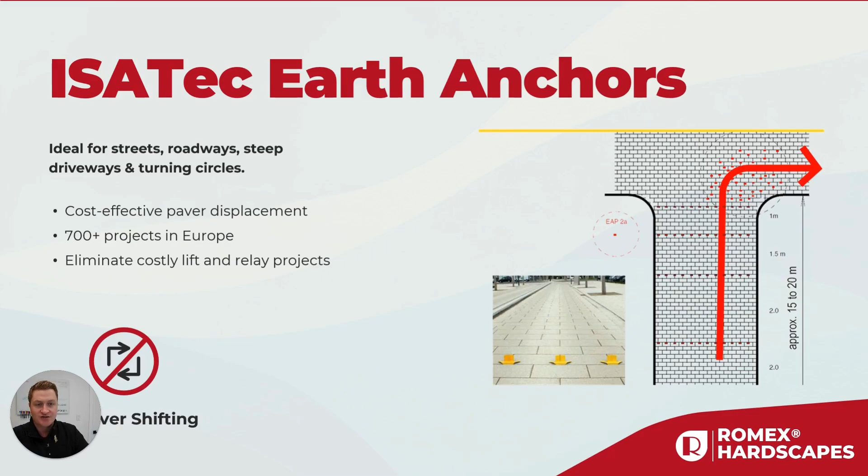Whether you're a homeowner who lives on a steep slope or you have a commercial parking lot, this is a very good value option, quite low cost in the scope of the project, but the benefit is huge in terms of what it actually provides down the line. So basically, to have it done once and right, it eliminates the cost of expensive lift and relay situations, which can happen quickly in commercial spaces if things are not done right.